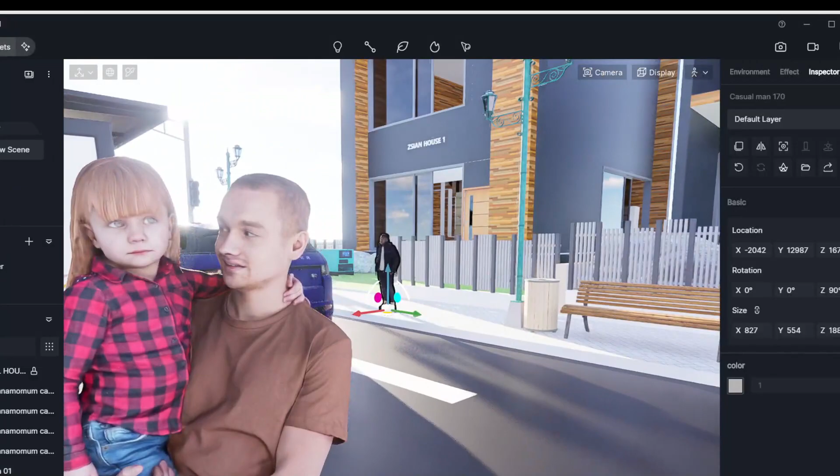Today we are going to be presenting our concept paper titled Binary Eye, the Future of Human Vision. Now we are going to proceed to our abstract, which Jovanie will read.

This concept paper proposes the development of a multifunctional contact lens integrating LiDAR technology and other advanced features to revolutionize human perception and interaction. The lens aims to transform the way we capture memories by creating immersive 3D models of our surroundings, enhancing situational awareness for safe driving and navigation, and providing invaluable assistance to visually and hearing impaired individuals.

Through real-time object detection, transcription, and sound recognition, while seamlessly integrating with Bluetooth headsets and digital assistants, these innovative devices promise to redefine the way we interact with technology and the world around us. This paper will delve into the technological advancements required, explore the potential applications in various fields such as healthcare, transportation, and communication, and discuss the ethical considerations and societal implications of such a transformative device.

So this is the 3D model of our binary eye, which we made using the software Blender. As you can see, there are two shapes right here: the first is the human eyeball, and the second is our lens, the binary eye. Notice at the top of the eyeball there are three chips. These are the sensors that we propose: the LiDAR sensors, the ambient light sensors, the gyroscopes, the micro cameras, and other essential sensors needed for this binary eye.

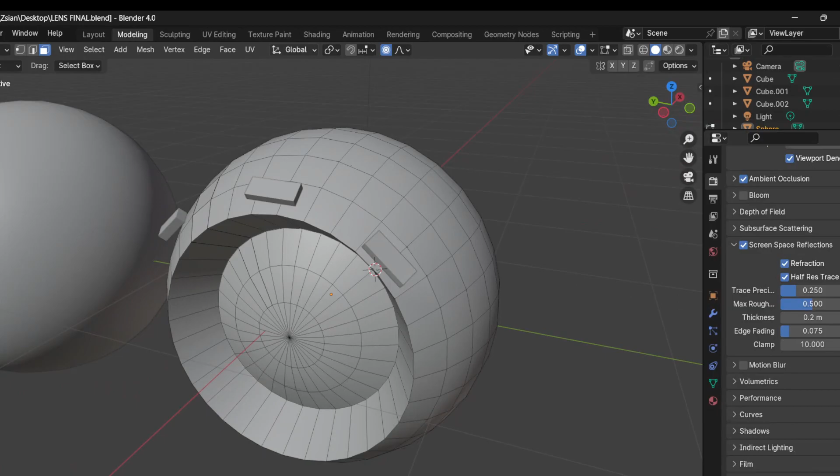So this is the model, and for the shading we are using different types of nodes: texture coordinates, mapping, Voronoi texture, and color ramp. For the Voronoi texture, we can see the roughness. If we level that down to 0, it becomes glossy.

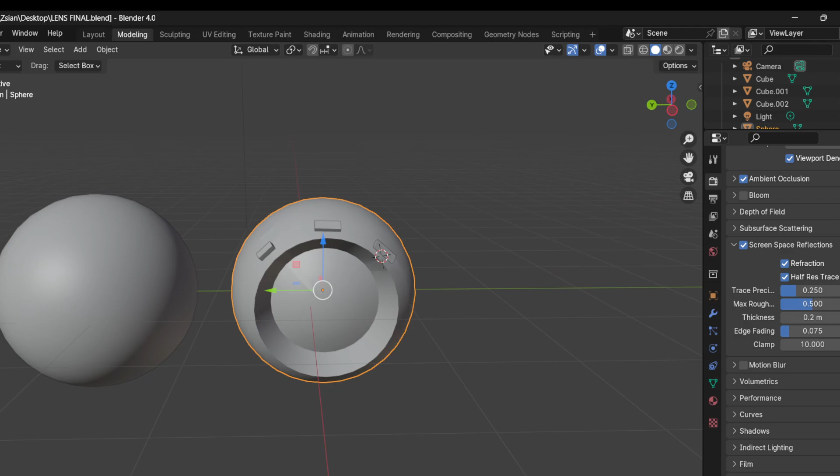And this is the lens when being equipped with the eyeball. We move the lens inside the human eyeball, go to shading, and this will be their view. As you can see, it has this glossy texture, and it can also protect our eyes from dust when we are navigating.

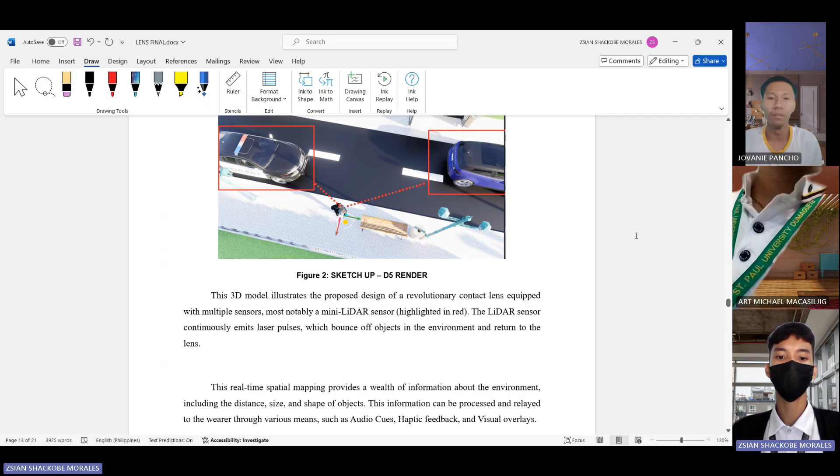Next is spatial awareness. This 3D model illustrates the proposed design of a revolutionary contact lens equipped with multiple sensors, most notably a mini LiDAR sensor. The LiDAR sensor continuously emits laser pulses which bounce off objects in the environment and return to the lens, as you can see in the illustration.

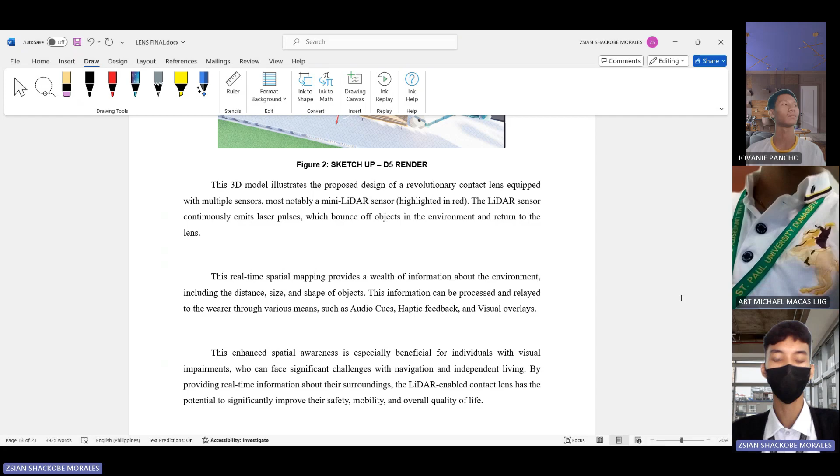The real-time spatial mapping provides a wealth of information about the environment, including the distance, size, and shape of objects. This information can be processed and relayed to the wearer through various means, such as audio cues, haptic feedback, and visual overlays. This enhanced spatial awareness is especially beneficial for individuals with visual impairments who face significant challenges with navigation and independent living. By providing real-time information about their surroundings, the LiDAR-enabled contact lens has the potential to significantly improve their safety, mobility, and overall quality of life.

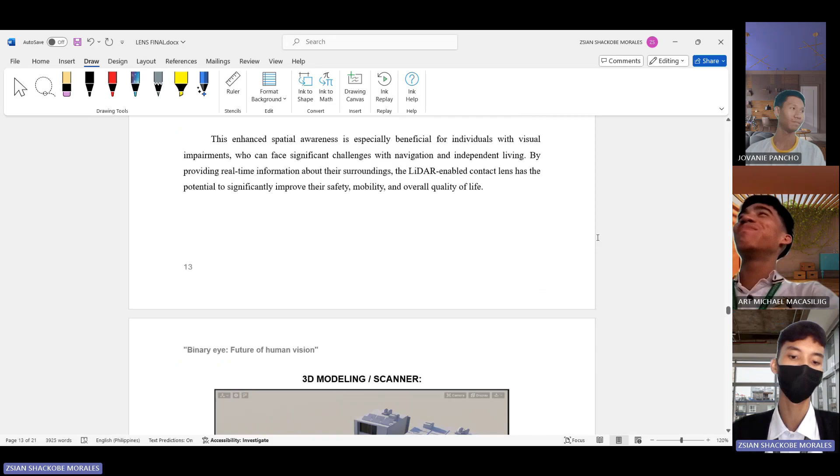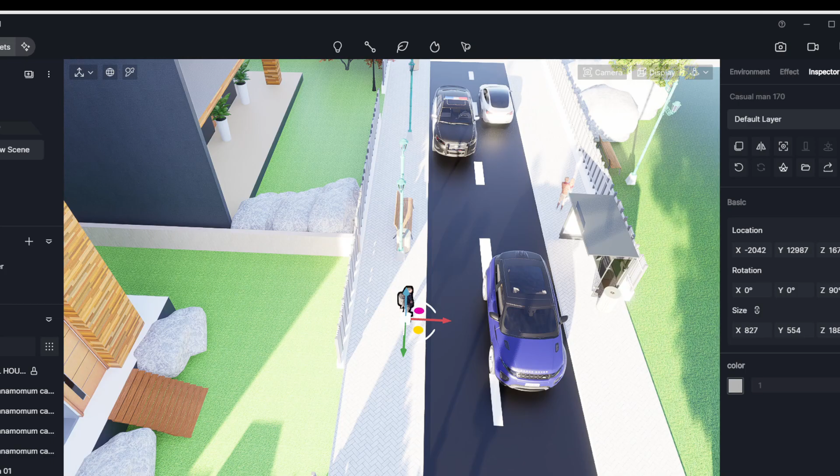Now, for our spatial awareness, we are using a software called SketchUp, and then we process it again using D5 Render and Unreal Engine. So right now we are in the D5 Render software. In our spatial awareness, this real-time spatial mapping provides a wealth of information about the environment, including the distance, size, and shape of objects. This can be processed and relayed to the wearer through various measures: audio cues, haptic feedback, and visual overlays, as we said earlier. So for example, as you can see here, this is our object.

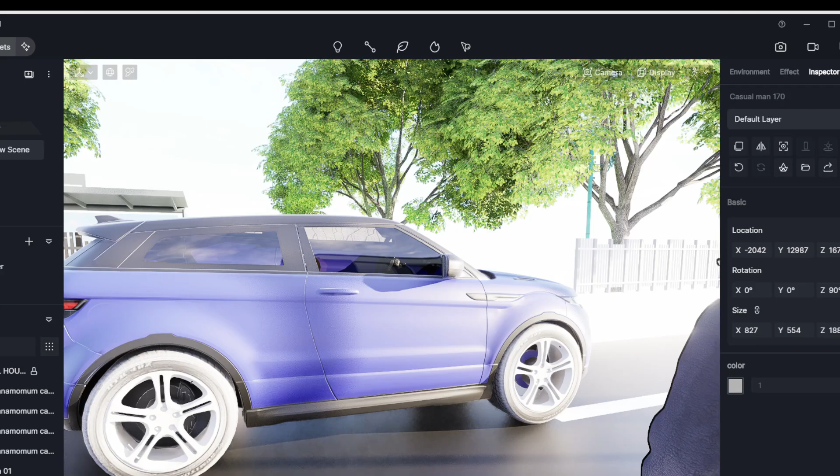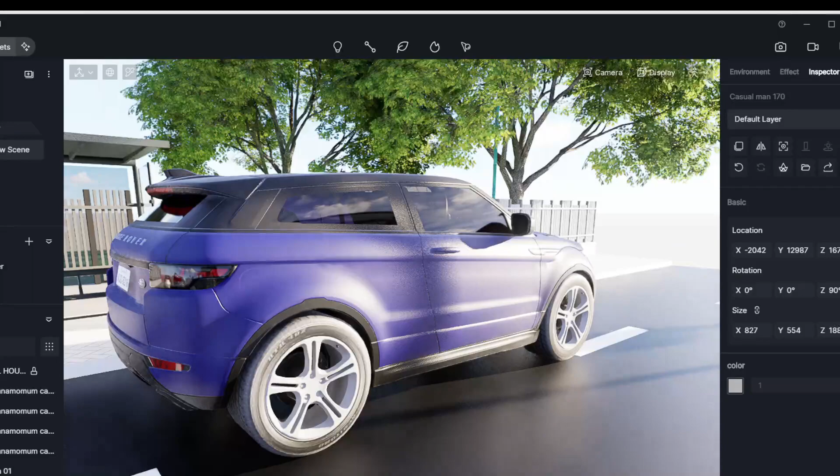Our contact lens has a sensor called LiDAR, which is backed by other sensors such as ambient light sensors and proximity sensors. They burst out lots of lasers that bounce through whatever is in front of them and go back to the lens. So it has an overlay which can detect the distance of these cars going across the streets, and it can also scan the environment for potential risks and dangers.

As you can see, a father here holding a child. This can help those kinds of people, especially when they are crossing the streets, know about any potential hazards. This is very helpful, especially for people with visual and audio impairments, who face significant challenges when it comes to these kinds of problems.

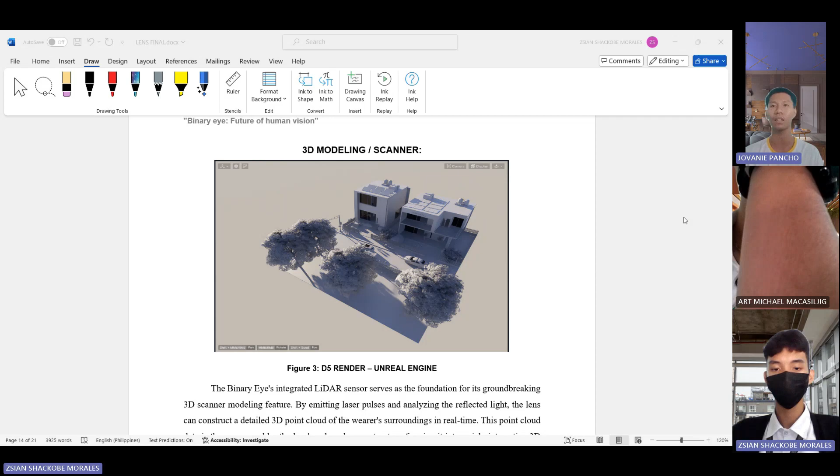3D modeling / scanner. The binary eye's integrated LiDAR sensors serve as the foundation for its groundbreaking 3D scanner modeling feature. By emitting laser pulses and analyzing the reflected light, the lens can construct a detailed 3D point cloud of the wearer's surroundings in real time.

This point cloud data is then processed by the lens's onboard computer, transforming it into a rich interactive 3D model. Unlike traditional photos or videos, these 3D models capture depth and spatial relations of objects in a scene, providing a more immersive and realistic representation of the wearer's experience. Users can revisit these 3D models later, virtually stepping back into the moment they were captured.

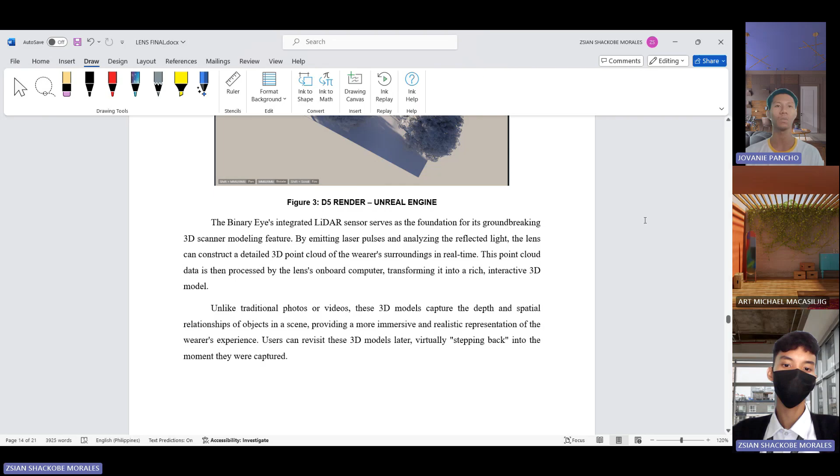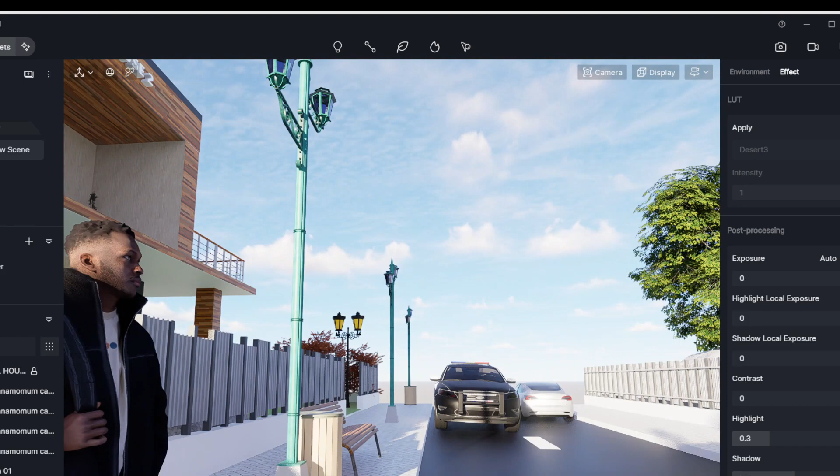Now, for our 3D modeling scanner, our binary eye or contact lens is also equipped with micro cameras and other sensors. The major sensor we are using for this 3D modeling is our LiDAR scanner, which is used in various smartphones today, and even NASA uses this type of technology to 3D map the surfaces of the moon and other planets.

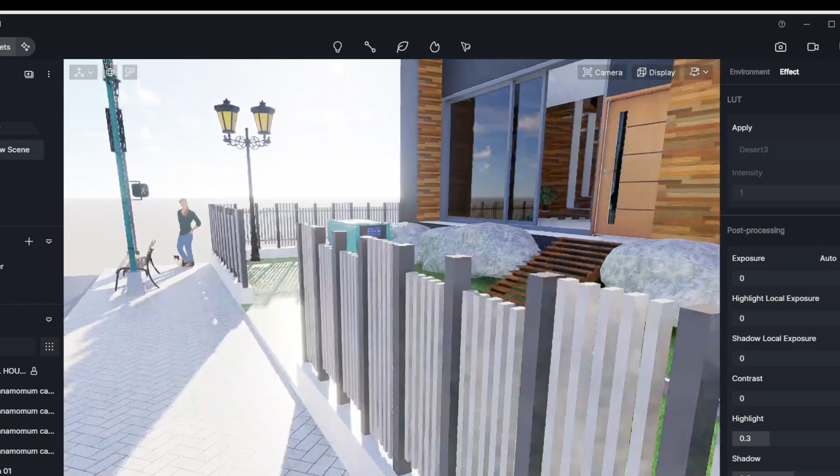So right now, for example, a user wants to take a picture of his house, the car, or whatever is in front of him. He can create a 3D model of it. In this way, we can also revolutionize photography and how we capture video, pictures, or whatever.

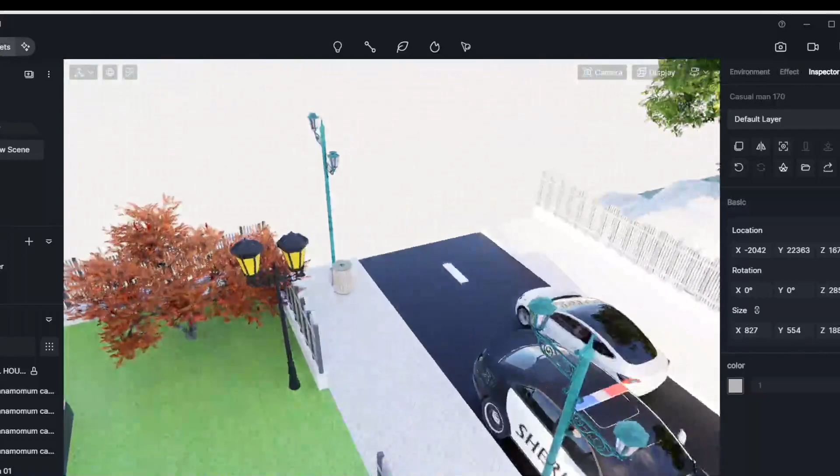So for example, this man wants to capture his house, which is this one, the Xian House 2. The way it works is when they capture the image, it will not directly show the colors or the textures. It will create the model, which is this one.

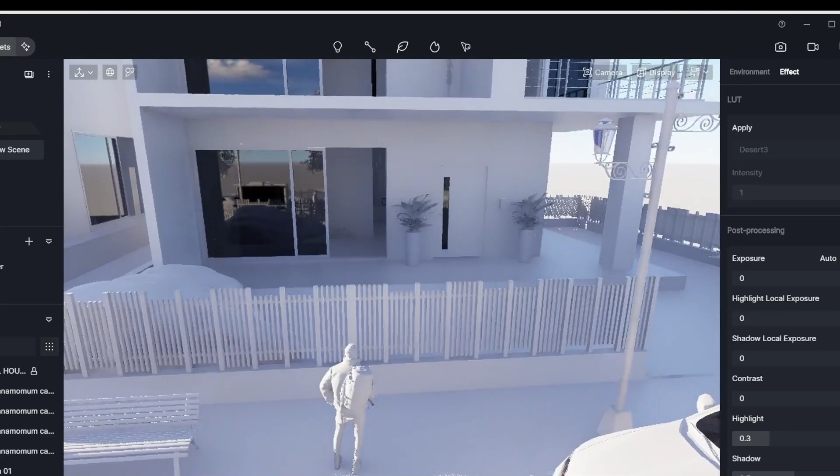This will be the first view of the 3D model after the user captures his house. As you can see, there are still no colors, no textures. It is like a plain version of the 3D model, as you can see right here.

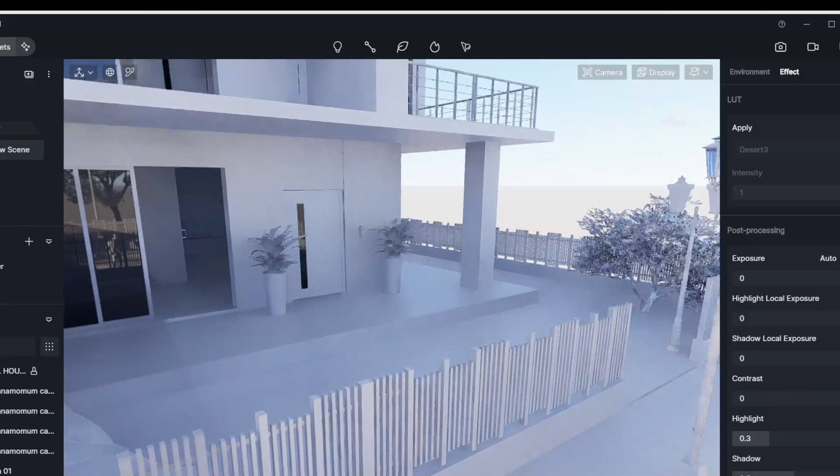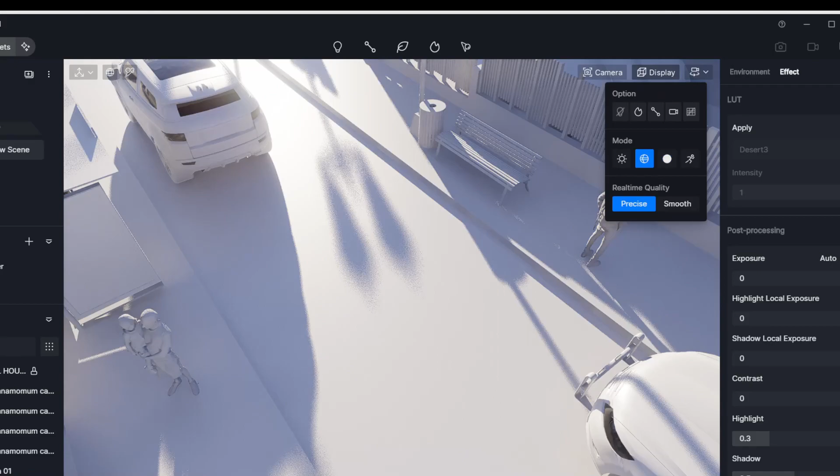This is because in this type of photography, it needs lots of time to process, unlike other traditional 2D photography. This is 3D photography, so it needs lots of data to process this kind of technology. After a couple of minutes, it will now display the full model with colors, complete with details and other features, and now the user has created this 3D model of the house he built.

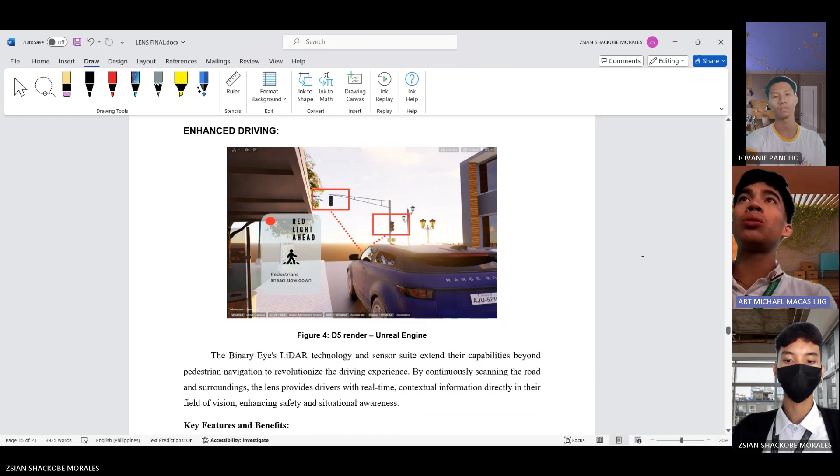So enhanced driving: the Binary Eye's LiDAR technology and sensor suite extend their capability beyond pedestrian navigation to revolutionize the driving experience. By continuously scanning the road and surroundings, the lens provides the driver with real-time contextual information directly in their field of vision, enhancing safety and situational awareness.

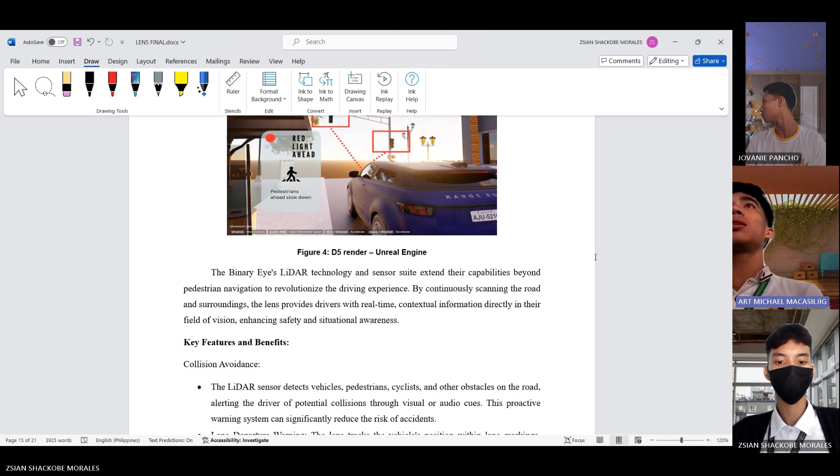Key features and benefits: collision avoidance. The LiDAR sensor detects vehicles, pedestrians, cyclists, and other obstacles, alerting the driver of potential collisions through visual or audio cues. This proactive warning system can significantly reduce the risk of accidents.

Lane departure warning. The lens tracks the vehicle's position within lane markings, providing a gentle alert if the driver unintentionally drifts out of their lane.

Adaptive cruise control. By monitoring the distance to the vehicle ahead, the lens can assist with maintaining a safe following distance, automatically adjusting speed as needed.

Binary eye speed limit and traffic sign recognition. The lens can identify and display speed limits and traffic signs directly in the driver's field of view, ensuring they are always aware of the current regulations.

Navigation assistance. The lens can overlay turn-by-turn directions on the road, eliminating the need to glance at a separate GPS device or smartphone screen.

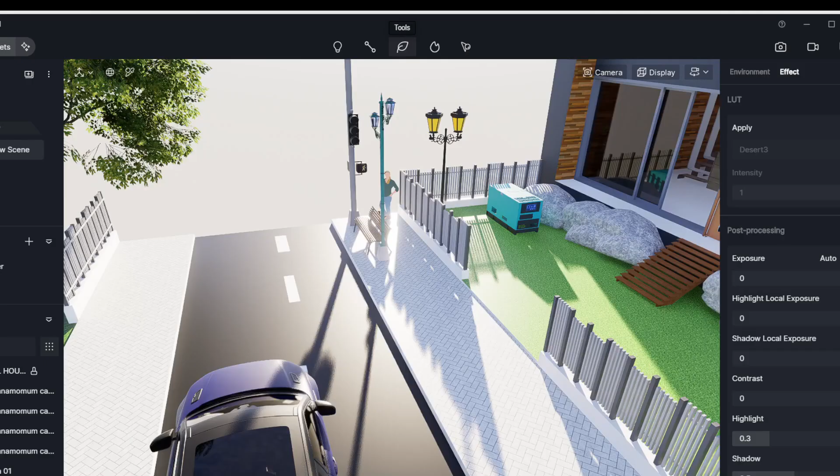Now for our enhanced driving, as we all know today, the major type of navigation that helps us throughout our driving is on our smartphone, like Waze, Google Maps, and other navigation systems.

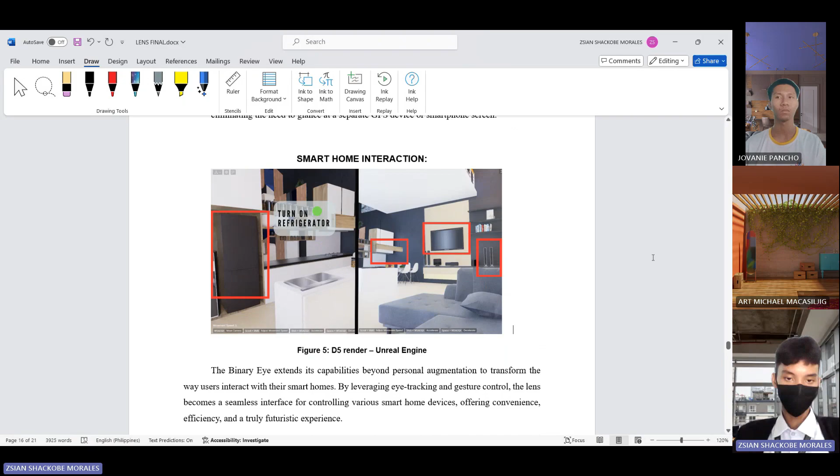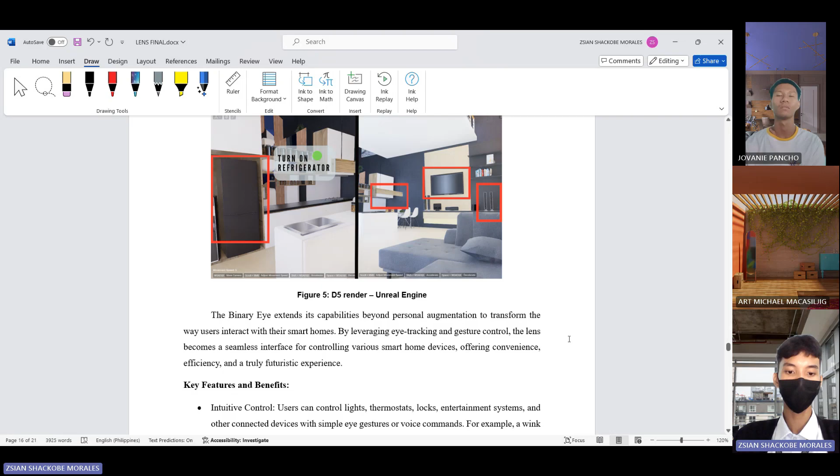Next is smart home interaction. The binary eye extends its capabilities beyond personal augmentation to transform the way users interact with their smart homes by leveraging eye tracking and gesture control. The lens becomes a seamless interface for controlling various smart home devices, offering convenience, efficiency, and a truly futuristic experience.

Key features and benefits: intuitive control. Users can control lights, thermostats, locks, entertainment systems, and other connected devices with simple eye gestures or voice commands. For example, a wink could turn off lights, a double blink could adjust the thermostat, and a voice command like 'play music' could activate audio systems.

Customization. The lens interface can be personalized to match individual preferences, allowing users to create custom gestures or voice commands for their most frequently used devices or actions.

Next is real-time feedback. The lens can provide visual feedback on the status of smart home devices, such as displaying the current temperature or confirming that a command has been executed.

Security and privacy. The eye tracking and voice recognition technologies can be used for biometric authentication, ensuring that only authorized users can control the smart home systems.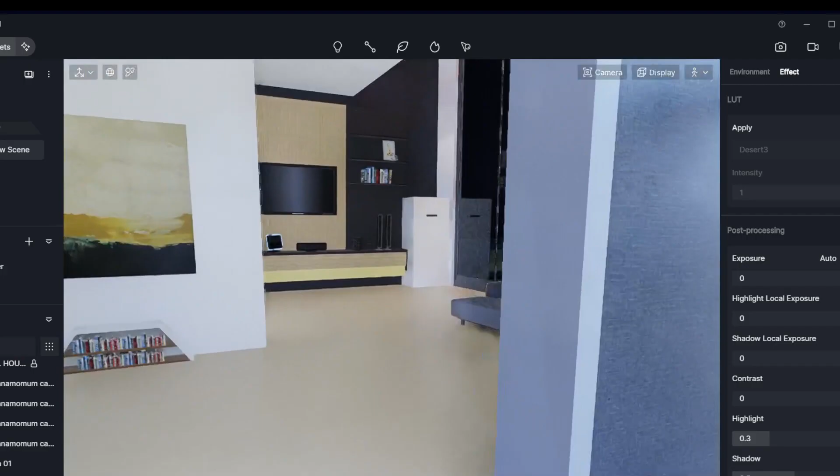Now, for our smart home interaction, as we all know, most of our smart home appliances, such as smart lights and televisions, are controlled over an app, and the app itself is voice-commanded, such as Google Home. This can be used for controlling our lights and other devices.

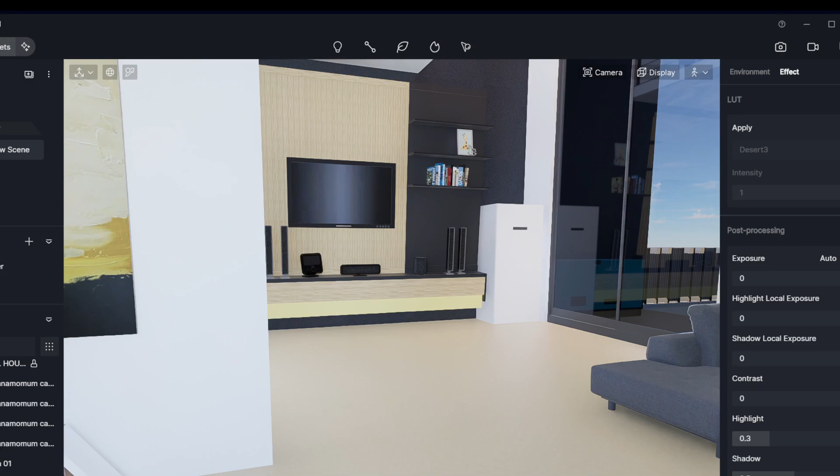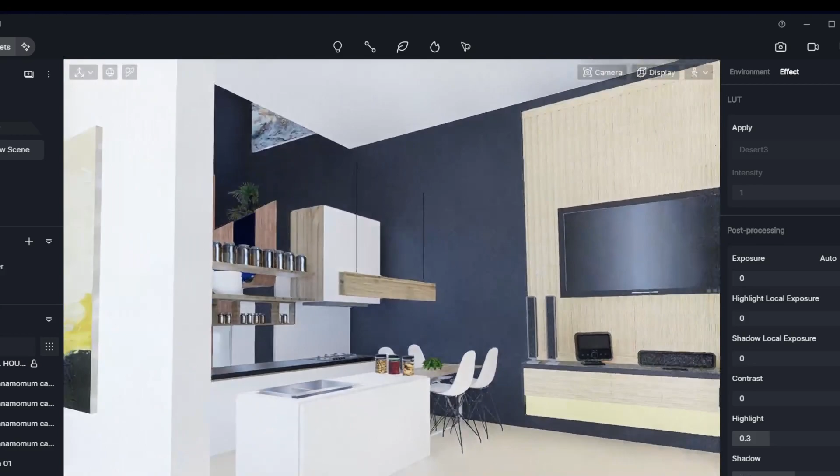So in ours, there's an integrated smart home chip, so you can interact with smart home appliances without needing your phone, without needing Google, Siri, or any other voice assistants out there, which is more convenient than using our phone.

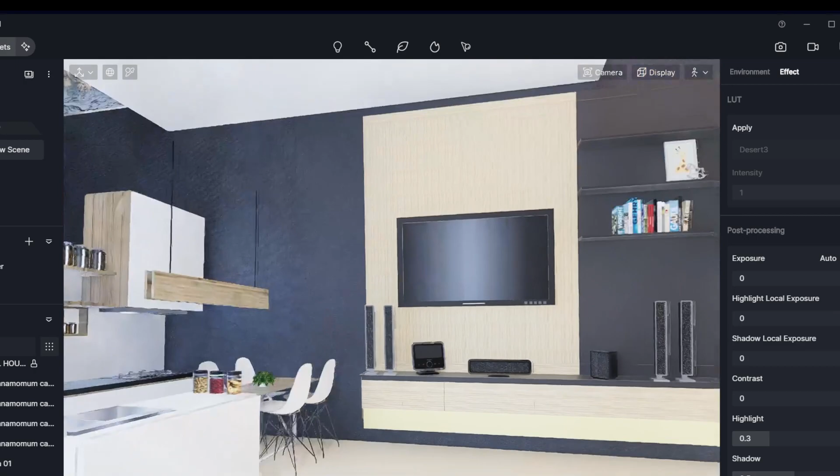We are using eye gestures. For example, if we blink twice, the television will turn on, the audio system will turn on, or the refrigerator, or you can customize whatever gestures you like to control your appliances. Now that's for our smart home interaction.

Ethical considerations. Number one, privacy and data security. Data collection: the lenses will collect a vast amount of personal data, including location, visual information, and potentially even biometric data. It's essential to address how this data will be stored, who will have access to it, and how it will be protected from unauthorized access or misuse.

Consent: users should be fully informed about the types of data being collected, how it will be used, and who it will be shared with. They should have the option to opt out of certain data collection to limit how their data is used.

Anonymization: explore methods to anonymize or de-identify data to protect user privacy while still allowing for data analysis and research.

Next is health and safety. Long-term effects: investigate the potential long-term effects of wearing LiDAR-enabled contact lenses, including the impact of laser emission on eye health and the potential for discomfort or irritation. Safety protocols: discuss the need for rigorous testing and safety protocols to ensure the lenses meet or exceed safety standards before they are made available to the public.